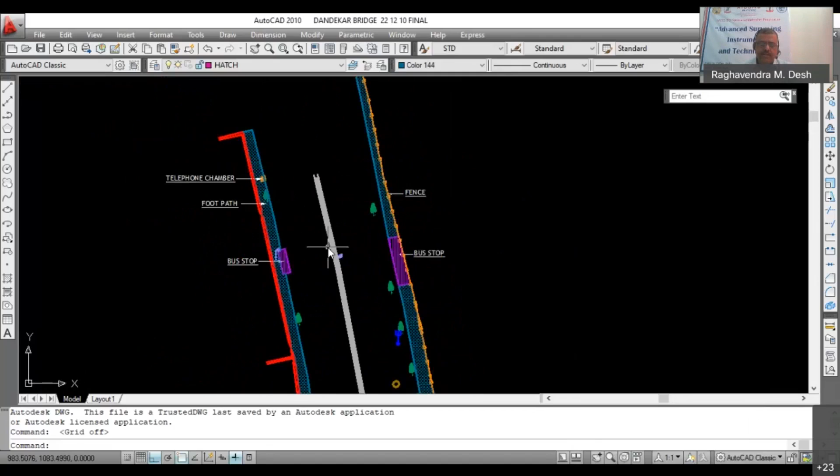If you see these drawings, I will start from the top. What we are collecting is everything between the roads - the plot boundary, the compound wall, on the other side this is fence, then the footpath, the divider in between, the trees if there are any, the chambers. Then we come to this junction, where there is a traffic island with some statue. Then again the same details all around the four lanes, five lanes which are going there.

Now the interesting part is this - you can see the table. We discussed with the traffic department as well as the Pune Municipal Corporation's Pune Police Traffic Department and Pune Municipal Corporation Traffic Department. They wanted data along with the drawing which gives the existing phasing and timing.

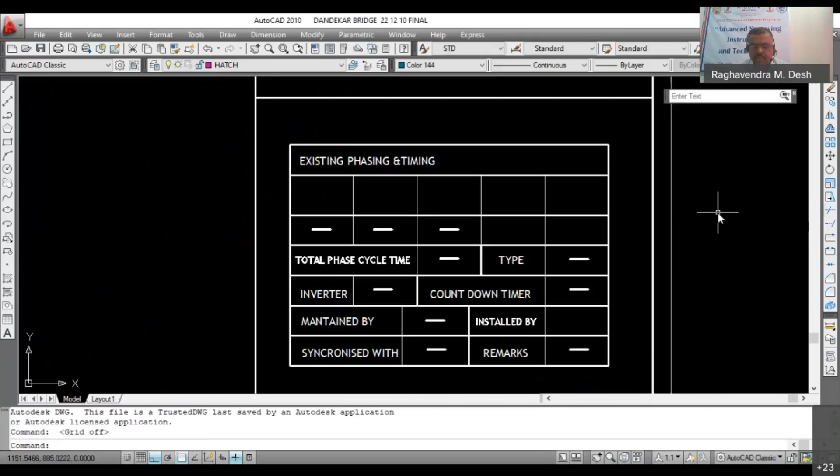Now, what does that mean? Unfortunately, we didn't have any data for this particular thing, but I will share another drawing which gives this data. Just a moment... Sorry, I'm just trying to get the drawing which has this data. We filled up that data actually, it's placed somewhere, but it's not there. I'm sorry, unfortunately I don't have that data.

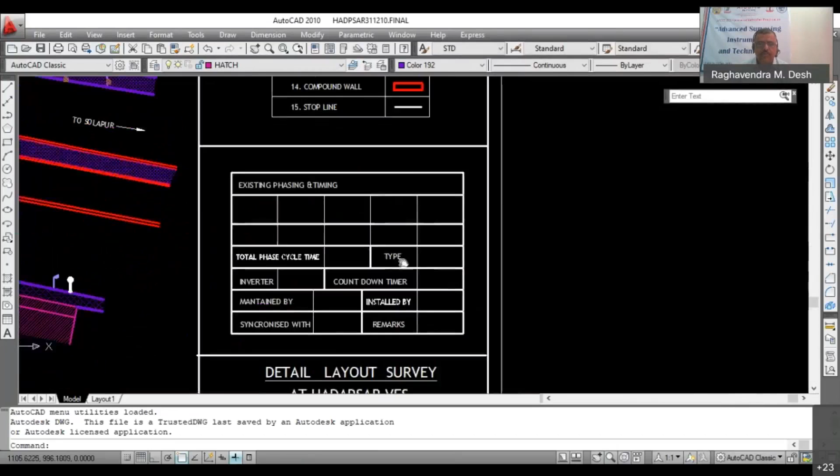But these are the columns which show the direction of the signal, and below that we mention the timing of that signal - how much time is given for that particular signal. For example, suppose you are coming from here and you have to turn right - then the signal in front of you, for how long is it operating, and likewise for all other sides as well.

And then we have to work out the total phase cycle time, how much total signal timing there is, then the type of the signal, whether it is LED or conventional light, and likewise whether it has any inverter facility, so that in the absence of MSEB, if there is MSEB failure, then the inverter can be put to use.

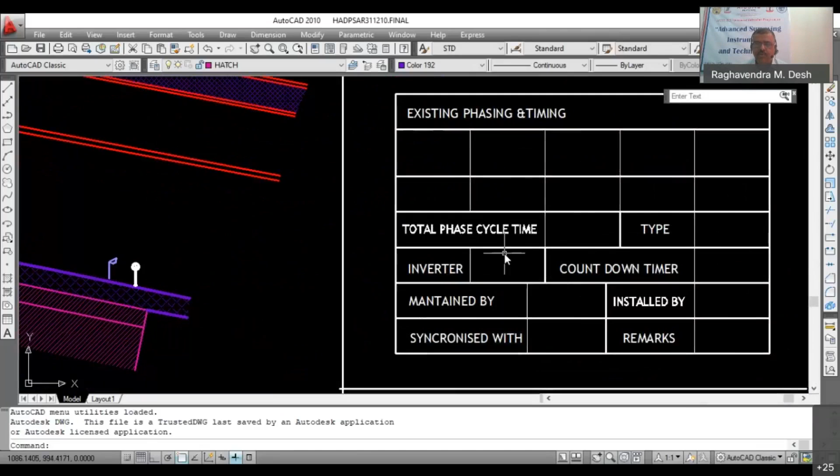And what is the countdown timer? Because now, when the traffic signal is operating for say 30 seconds or 15 seconds or likewise, you also get a countdown timer from the other signals, that this signal is going to be activated in say another 60 seconds or 90 seconds. So that countdown timer, whether that facility is available there.

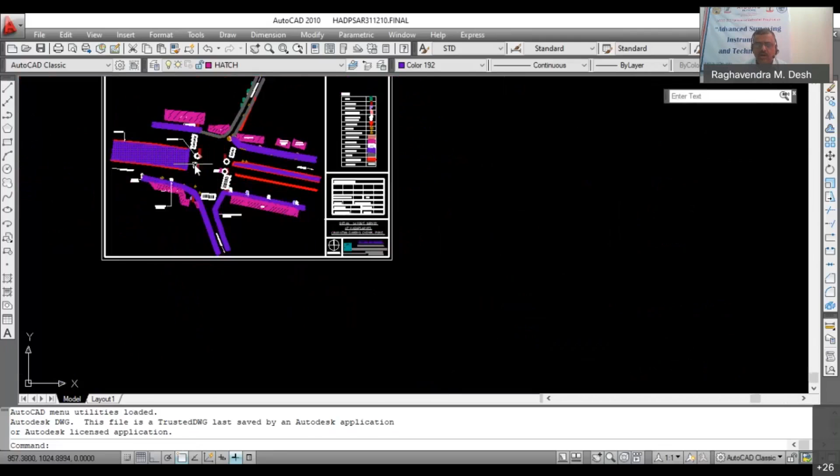Then who is maintaining that particular signal, the entire setup of that signal? So that was one part. Who has installed it? Then also, this is interesting - whether you can see the junction here, but if this signal is synchronized with the earlier signal on all the other sides. So that was one thing which we have taken there.

And then the remark, if there is any specific remark for that particular road junction. Now you see this is a good combination of survey drawing and the data. Now you can see all these things integrated in GIS, the drawing and the data. So likewise, even at a very small level, even if you don't have facilities like DGPS or GIS, you can still maintain these records.

Now we have seen about 500 to 600 road junction booklets with the Pune traffic police people who have all this data at a certain point of time. Now this data was not updated. As we discussed yesterday, this kind of data is useful for budgeting, for planning, for how you can phase out automation of road signals at almost every junction, and whether the position of signals is correct or not.

Because as development takes place in a particular area, the road width increases, traffic density increases, then you may have to change the signal position as well. Even the phase timing and all this data can be changed, modified if required, and then prepare a new drawing which will again form the basis for further record.

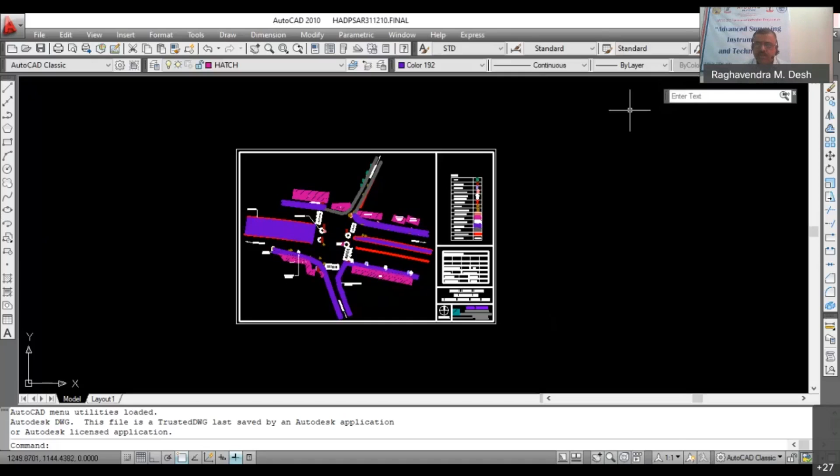So this is an interesting example of what we can call the traffic junction survey. Now these things can continuously go on every year, and there is a lot of opportunity created for jobs for surveyors, because then there is no dearth of survey work. Now you can see this particular drawing again here.

As you may be aware, whenever road development takes place or road widening happens, you tend to change the road levels with a new gradient, or if an asphalt road is to be turned into a concrete road, then you need to have the levels and what would be the final level of that.

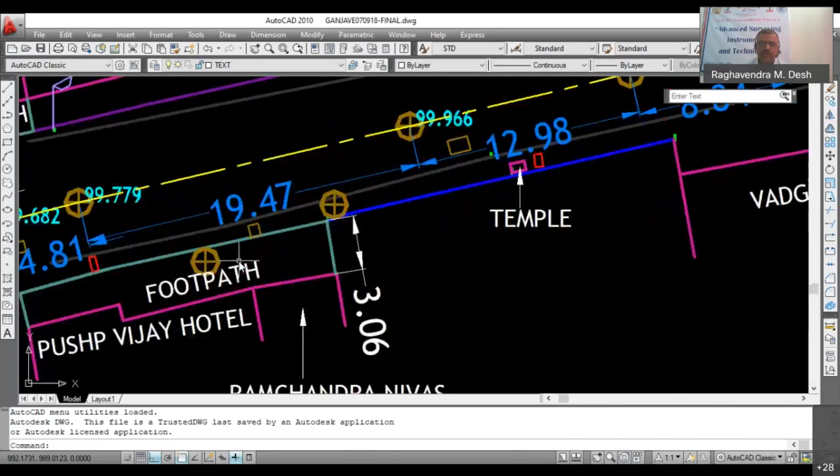So here you can see we have done the survey of a road. As you can see here, these are the road edges, then this is the center line of the road, the tentative center line of course, and the structures which are adjoining the road. Now these structures are important to know.

We know the location of these structures is very important, because when you want to expand the road, how far they are touching that. Now this is a physical record of the structures. When a road, in the DP plan, road widening and all the things are mentioned, most of the times they are not concurrent with the ground reality.

So these locations, if a road has to be developed or a stretch of a road has to be developed, then you need a survey which will give you the readings of that particular existing road level and how up or down you want to raise that level. So these kinds of surveys are also required for road contractors, for municipal corporations.

Because then you have this in AutoCAD drawing, you have the total road length, the BOQ, and everything can be prepared based on this. So how important are these drawings, survey drawings? You will understand when we see this kind of data being put on the drawing.

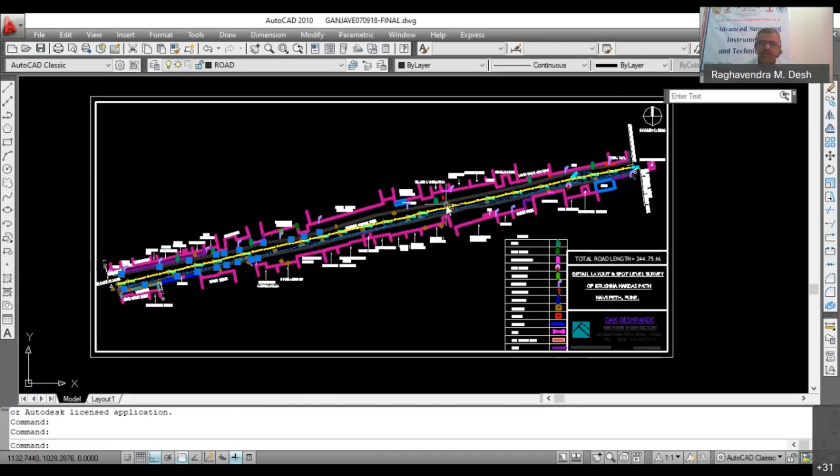So as I mentioned earlier, it is again a technical document basically. I mean, any survey is not just a drawing; it's a technical document. So we'll move on to some other drawings as well.

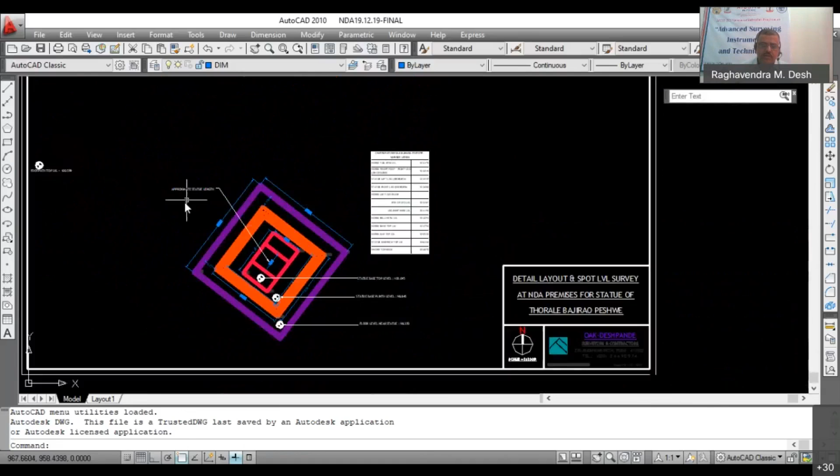So one more interesting survey we have conducted last year. I would have preferred the photograph. This is a survey we have done in NDA, Pune. They want to put up a statue of Thorale Bajirao Peshwe within the premises, and for that there's a reference to the Chhatrapati Shivaji Maharaj statue. This is the position of the Chhatrapati Shivaji Maharaj statue, and this is the proposed location for the Thorale Bajirao Peshwe statue.

Now you can see here, this is the top platform. What are the levels we have shown here? You can see the level at the bottom, a step higher here. Then almost the same level. Then this is the top of the statue here, the base of the statue on the top of that mound.

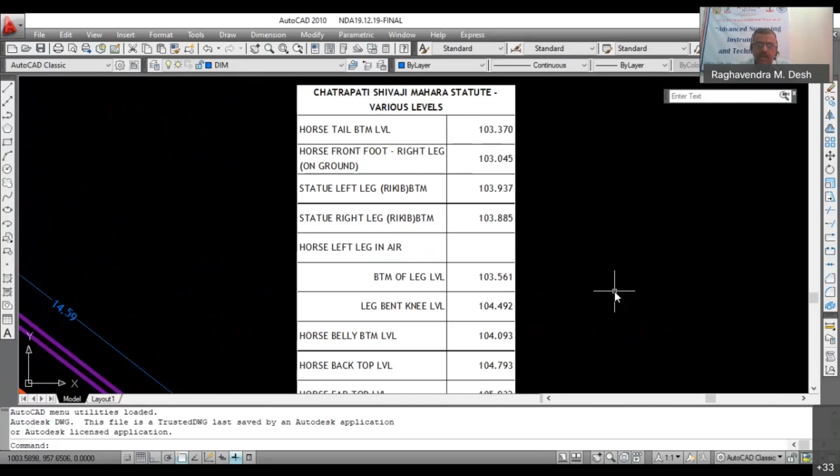Now what levels we have taken, you can see the various levels: the horse tail bottom level, then the horse front foot right leg - the front foot is raised above the ground. Then statue left leg bottom level, statue right leg bottom level, horse left leg in air - the bottom of the leg as well as where the leg is bent at the knee level. That level we have collected.

Then the horse belly bottom level, horse back top level, horse ear top level. The statue's shirpech, or crown of Chhatrapati Shivaji Maharaj, top level of that, and the sword which he's holding in his hand, the top level of that as well, top edge. So you can see all these levels we have collected.

Now again, these things can be possible with measurement as well, but when you want to relate that in the drawing with the position, then you have to have such kind of survey done, and this gives a fair idea for people who cannot really imagine or visualize how things are there. So a photograph attached here of that Chhatrapati Shivaji Maharaj statue would explain everything we have collected here, and the position, how they are placed, and when the other statue is to be erected, what should be the levels for that.

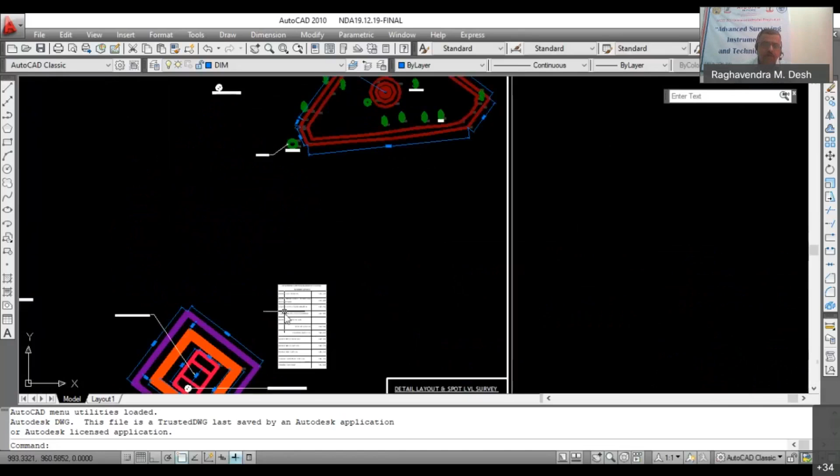Base and everything can be determined from this statue as well, because they don't want the Thorale Bajirao Peshwe statue to be bigger than the Chhatrapati Shivaji Maharaj statue. So that was a statutory requirement for this particular statue erection. So here you can get this thing - why we have taken this list, for the same reason.

Even now you can see here, this is the length of that top bottom surface on which the statue is erected. So this is again an example of how survey can be utilized, how total station can be utilized for this type of data collection. We would call it a data collection rather than a survey - data collected and represented on the drawing. That is how we look at it.

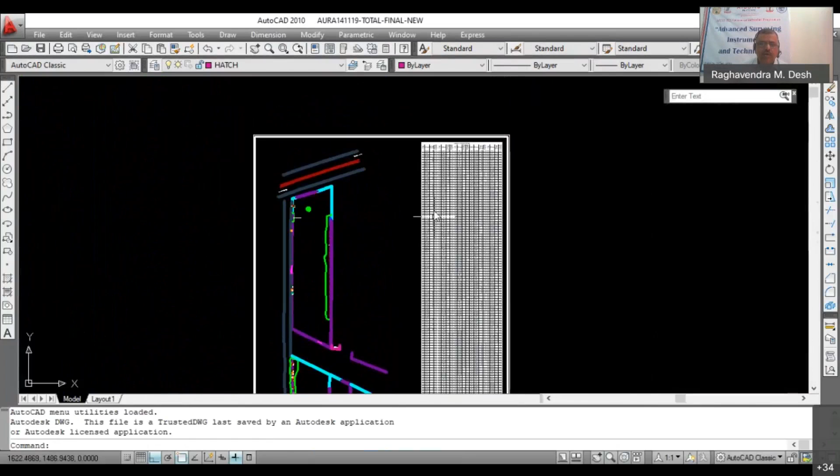Now, again, as we have seen yesterday about the drawing of a tree survey, here also we have done this tree survey and a table. As I told you yesterday, these things are required for auditing purposes. You can see the table here, the tree number which has been put on the tree and put on the drawing as well. Then this is the approximate bole diameter. At times we have given it in meters, so it has to be in either centimeters or inches to understand it properly, because everybody doesn't understand these decimal things in meters.

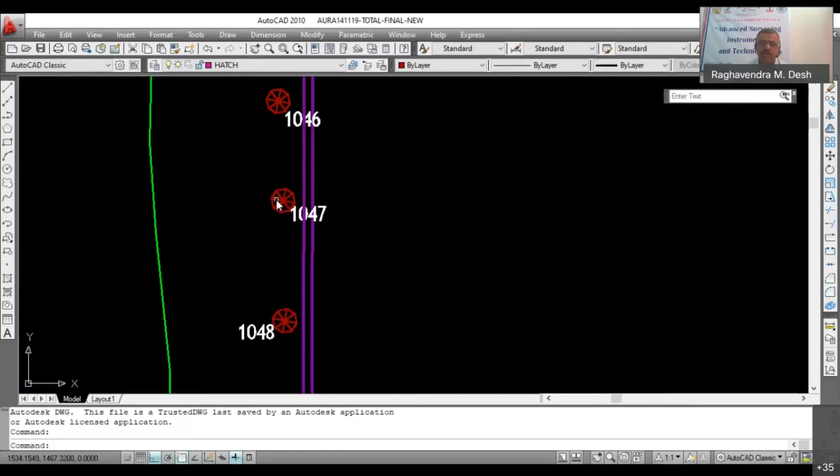And the approximate height - though now where this is, we have said 'P', that is the newly planted trees, very new trees which are hardly a meter or so, and they have grown up a little bit - this 2 meter, 3 meter, or 6 meter tree. Now you can see here, these things when they go to the environmental department for their audit, these kind of numbers are put up. Then we have mentioned this prepared block and nomenclature it as tree coconut - so it's a coconut tree. This is again shown in this legend as well. Now tree coconut, you can see it here.

One more aspect of doing the drawings from the survey we have done is the use of layers. I will just show you how many layers we have used here.

Now you can see these are the layers. These are the mandatory layers from AutoCAD: compound wall, dimension, divider, GI sheet. The GI sheet we have taken the other time. This survey we have done twice, so this is the original and this is a new GI sheet. Then gate, structure, thick edges, and every tree that has been surveyed is put into the layer. Now, why is this layer business required?

Because then the drawing can be very well distinguished. If you want to measure the number of trees for a particular type, say you want to see the Christmas tree or coconut tree, you can just switch off all other layers, open that layer, and count them. So you get a count of each type of tree in that drawing. You can also get the total number of trees by numbers, but the category-wise or name-wise differentiation of trees can be obtained from these layers. So this is how the layer business is actually used, and very effectively used.

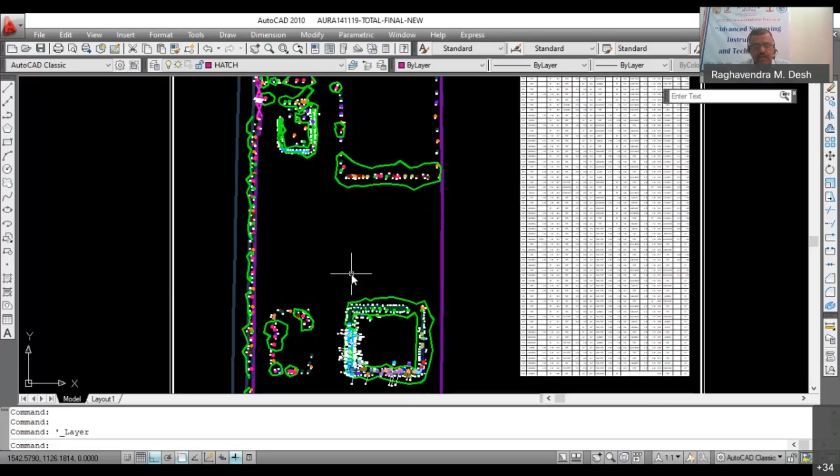So this is one of the surveys we conducted for the tree survey. The frequency of these surveys has increased over the last year or so, because the environmental requirements are all there. So these kinds of surveys have increased.

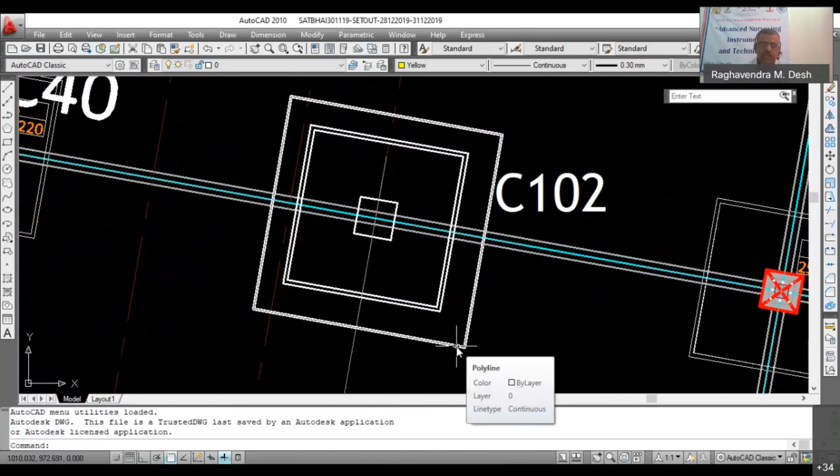Now you can see here, this is the footing. Then we have given these points at a different location, even outside the footing, so that the excavation margin and everything is taken care of. Then, as we told yesterday, here we have not marked those circles and points, because now these are represented by the column number. Here what we have to do is give the setting out first for the footing.

For the PCC, then footing, then in industrial cases it is the pedestal which is then cast. If the pedestal is cast, we treat it as a column only. We even call it an RCC pedestal on which the base plate and the foundation bolts, or column bolts, would be mounted. Now those starter points are marked again.

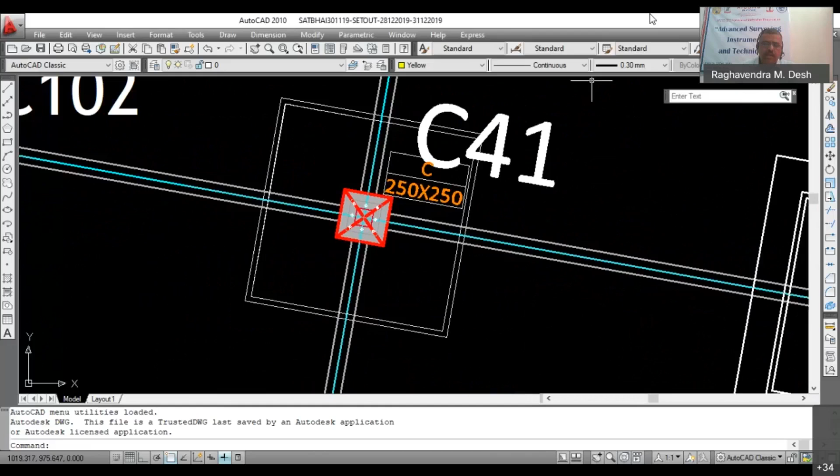And then when you want to fix the base plate, this base plate position also can be marked along with the bolt. Now, as you are aware, whenever this base plate is to be put on top of the pedestal, first we have to mark the bolts. Once the bolts are concreted, then only the base plate will be fixed on that, and then the nut would be fixed likewise.

So here, these are the points which are marked. You have to take the base plate and the bolts, and then the position of the base plate and bolts is fixed on top of the pedestals. It is tied or welded properly, and then the casting is done. So for industrial purposes, up to these points, the survey setting out work can go on.

Then they don't have multiple floors, so for all these columns, these things happen and these setting outs can be done. Once these bolts are in position, we don't need further assistance from survey. Then the structures can come up, because nowadays they are all precast structures, so the structure can come up.

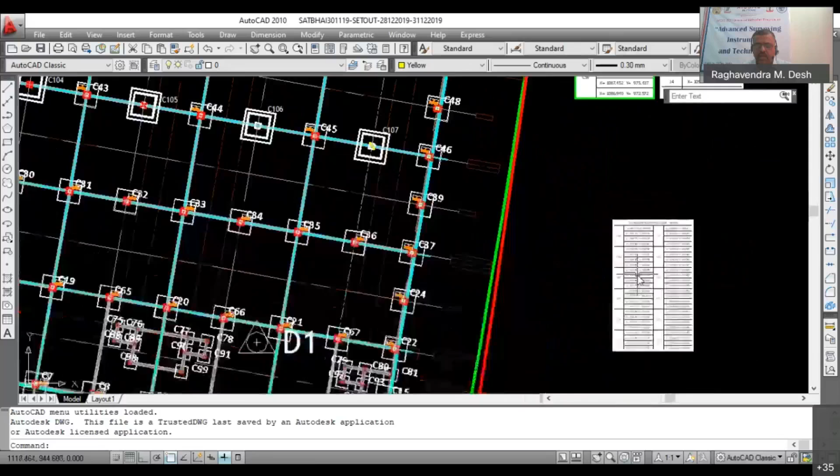Now we can give the coordinates like this: 1, 2, 3, 4. These coordinates represent the column corners, or rather the footing corners for that column. So we have to mention the coordinates for the footing corners, so that they represent that column footing.

So they are placed accordingly. Now, as we discussed yesterday, normally for a footing we take a marking of plus, on the edges of the PCC. At times, people also want these coordinates - the corner of the footing block - marked on the PCC, so that they can fix up the footing box accordingly.

One thing you must understand here is that whenever a surveyor goes to any construction site, he has to work in close coordination with the site engineer and contractor. Whatever services we are offering to these people, they should be put to maximum use. So you always need to discuss with them how they want these points. It's not a standard thing that wherever you go to site, you only work out certain points and do the setting out - you have to discuss and have close coordination with the site engineer and contractor as well.

Why the contractor? Because his people - his team of carpenters and fitters - would be working on these markings. So how comfortable are they with these markings? That is something you need to discuss with them. That is one aspect of interaction with the contractor.

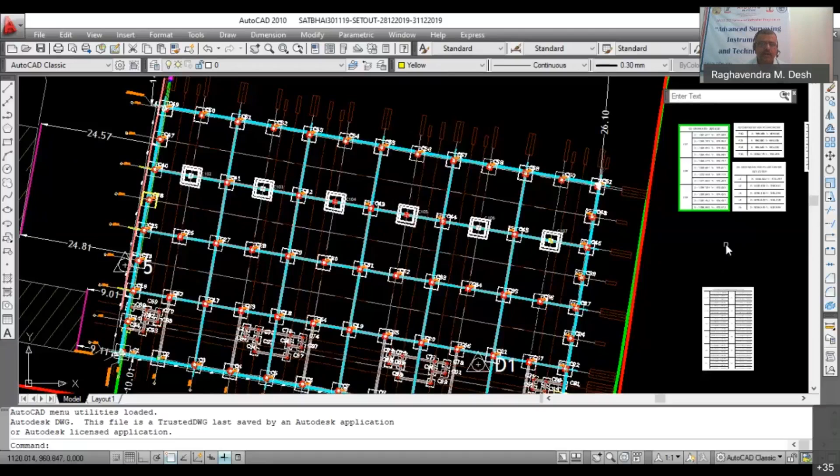Once they give their inputs, then accordingly you can work out the coordinates and do the setting out. Just because you have the machine and the facility to do that job doesn't mean you have to do it on your own - you have to have very close coordination with these people. Then only it will help them, then only it will boost their confidence that these things are really useful and accurate. They are definitely accurate, but when they see it on the ground, only then will they realize it, visualize it, and feel comfortable.

For these kinds of setting out, especially columns and footings, one more thing that comes along with setting out is that whenever these settings out are happening on site, the checking of these points should happen on a daily basis. So if my survey team goes on site and marks all the column centers, and just leaves without checking...

If there is something wrong - if that coordinate is not properly fed, or the machine has been slightly disturbed and the coordinates on ground are not correct - then if the contractors or engineer complain to you after a day or two that the points you set out are not correct, then everybody is at a loss: loss of time, loss of confidence, loss of interaction between the two.

So to avoid that, if checking is done on the same day, then you are sure that whatever points have been marked are correct. If not, they are corrected right there and then. So whatever work has been conducted on a particular day is not wasted. This is something we must understand - whenever we do these kinds of jobs, we have to ensure checking happens on a daily basis on site.

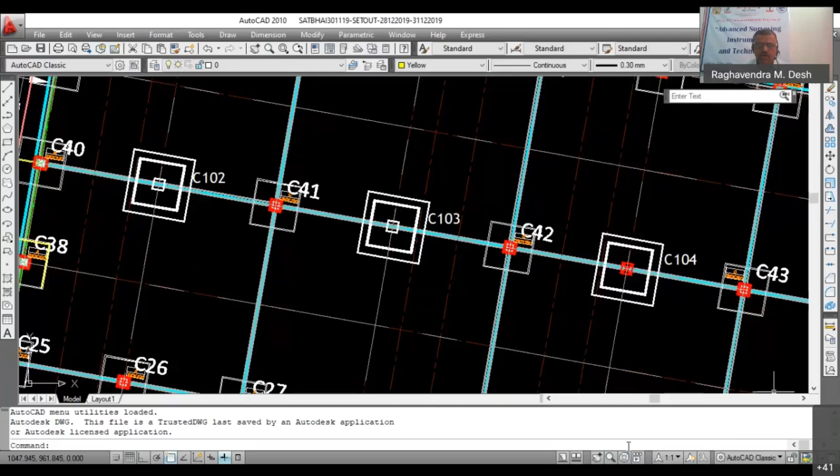At many sites, the total station is in use every day for continuous development - used every day to maintain the record and take the work forward. If this checking is not done and you just keep marking points going forward, you're not in a position to understand whether the previous day's work is correct or not. Engineers and contractors tend to believe that since you are using a total station, everything would be accurate. But you must remember the total station operator is also a human being, and is also subject to some kind of error.

He is also subject to making some kind of mistake. The only thing is that without blaming anybody, we have to correct that mistake on time and there itself, so that the work is smoothly continuing. So these are the few things.

Now, as you know, these things are not part of the academics. But whenever we are discussing or teaching total station and its utilities to the students, for every type of work they are doing, you have to take care of a few things. And those things, when people go out, even the engineer or diploma student who would not be working as a surveyor in future, he should understand these things.

He should be aware of these things, so that whenever a surveying agency is appointed or is there on site, he must understand what kind of work he has to get done from these people, and what kind of checks he has to make from the survey data that has been generated. Just because the total station is there, you cannot take things for granted that everything would be accurate and there would be no need to check.

Whatever is given by the surveyor is good enough and we can just go ahead with that - it's not like that always, though it is the case many times. But it depends on the quality of the surveyor and his experience, and the emphasis he is putting during the survey is equally important.

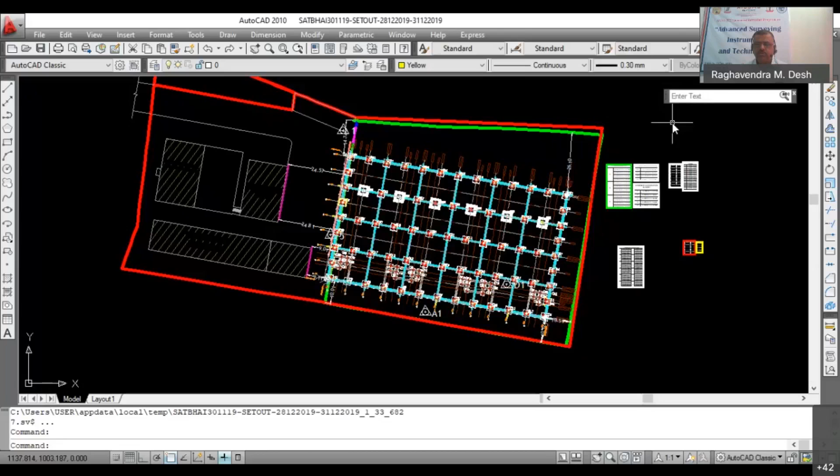We have seen - and I am also not an exception for that - even though we have been taught total station, when you go on site, you are fumbling there. You don't know how to conduct a survey on site. So the assignments or projects for survey, if conducted under the guidance of some professional agency, these people will understand it better. Even if they just observe and operate it in between, it would be helpful for them. So there are a few things attached with the survey.

We'll just move on to some other drawing now.

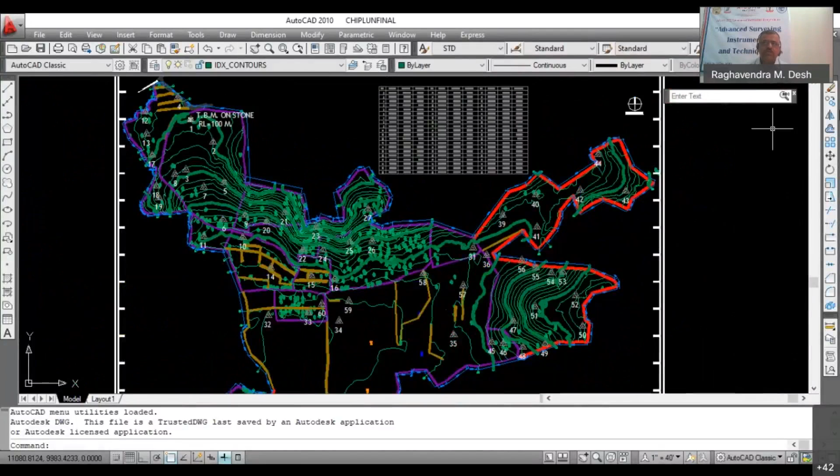Again, this is a survey plan for a chemical company, Gharda Chemicals. These are the details we normally collect, and you can see these details are consistently present in every drawing. Whenever a survey is conducted, there has to be consistency in collecting the data, processing that data, and putting it on the drawing.

We must always understand that when an assignment or job is completed and the drawings and deliverables are submitted to the client, they should be able to understand the drawing easily. A repetitive client may understand the drawing if the layers are constant - the type of layer, the name of the layers, the color combination of the schemes. These are not just cosmetic things which beautify the drawing; they are things which make the drawing easier to read. We should always have this approach when we prepare a drawing.

So even when the survey drawing is prepared in college, everybody can operate AutoCAD now - you don't do the drawings manually. If they want to do the drawing on AutoCAD, they should also make use of these things. In the civil engineering department, if a survey is conducted, we can also take help of AutoCAD, with someone teaching it to understand how the drawing is to be prepared.

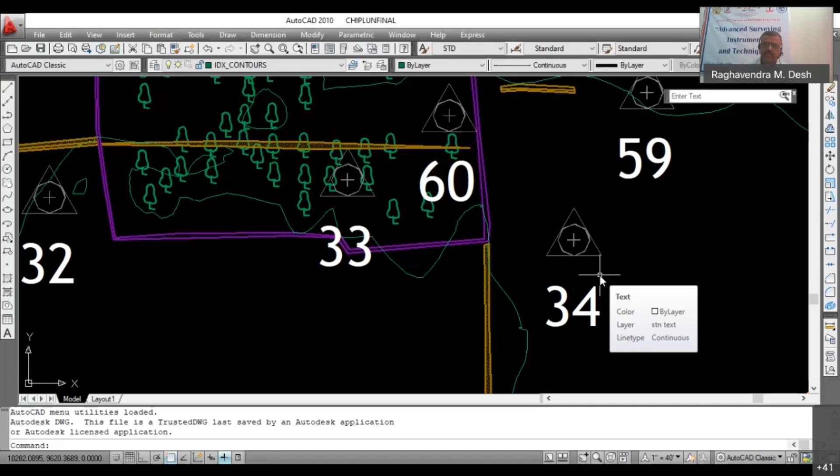Once you check that and get those things proper, then your survey is correct. So when the data comes, you have to understand whether the sanctity of the data is there or not. These are all subsequent things when you start using total station - collecting the data, checking the accuracy of the data, downloading the data, processing the data, and preparing a drawing finalized based on that data. This is how a total station survey proceeds.

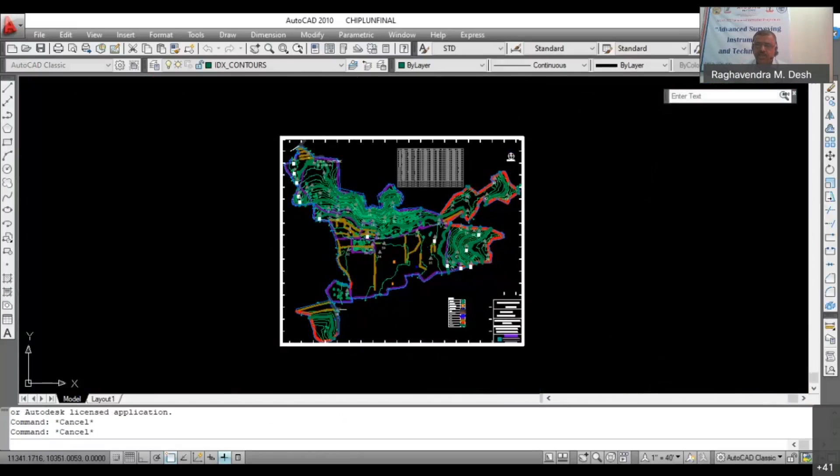Now, the survey has become easier comparatively as compared to earlier days - it has become very fast, very accurate, and more approachable to a number of people. Now you don't have to be an engineer to do a survey with total station.

As you are aware, the ITI also holds a course for a surveyor, which is about a 2 year old course, and maybe some lesser aspects of survey and working have been taught in that ITI 2 year course. The emphasis in ITI is more on the use of the total station. So they are less equipped with the technical knowledge of survey compared to diploma or degree students, but they know how to operate. So there is a basic difference - they are basically not surveyors, but mostly machine operators.

Now, looking at the increasing requirement of machine operators, many institutes have started short term courses. These short term courses can last from a week to about 6 months, or maximum a year, for total station operators.

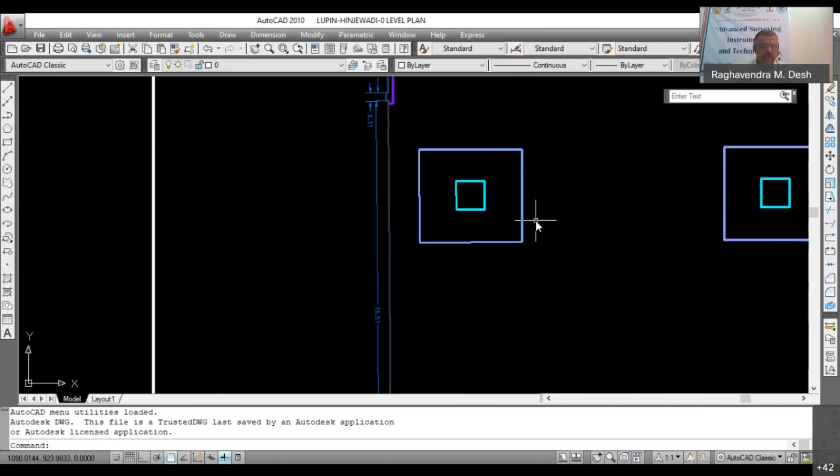Nowadays, on many sites they use the flat slab, so there are no beams, but there is a column head, or whatever different name they call it, but I call it as a column head. So this is the column and this is the column head.

Now to understand the purpose of this particular survey: this building was supposed to be hired from a particular company, from the building owner. Now when they want to hire this building, about 8 to 10 floors are there.

They want to understand the feasibility of the floor plans. Feasibility of the floor plan is how best they can put this floor plan to their requirement. So that was something they wanted to know, and they didn't want to rely on the old drawings. So they wanted to make these drawings, or I think those drawings were not available or made available to them. So they had to do this exercise to prepare the floor plans on each and every floor.

Now why these ceilings? I will tell you the requirement of this ceiling plan for the rest of the floors. Here, there are no tendons, so this is just the floor, and this is the column. These are the columns, then these are the same columns, but with the column head. So those two plans are the same plans at different levels for a particular floor.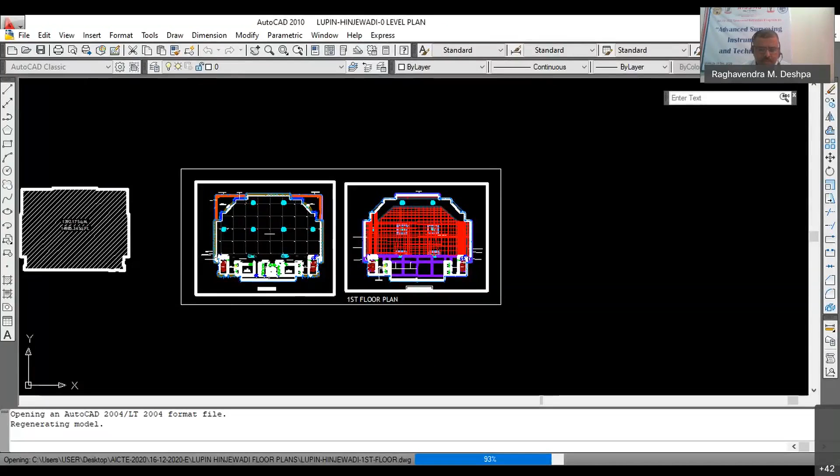Then when you go for a first floor, now you can see here. So whenever the drawing is opening, you can see these columns. Also they wanted to know the levels of the floor, whether the floor tiles and all the flooring has been removed properly or not, how much work, how much money they want to spend on cleaning or leveling the floor to a certain extent. So again, this is the data what they wanted.

Now you can see here, these red strips. You can see on every ceiling nowadays where the flat slab is there, they have to mark. You can say red paint marking, a paint strip is there. Now these are supposed to be tendons, I think, which are used in pre-stressed concrete, and you really cannot drill into these areas. So why they are shown here is to understand that you cannot drill along these red lines. You need to drill if you want to put up something, then it has to be between these lines.

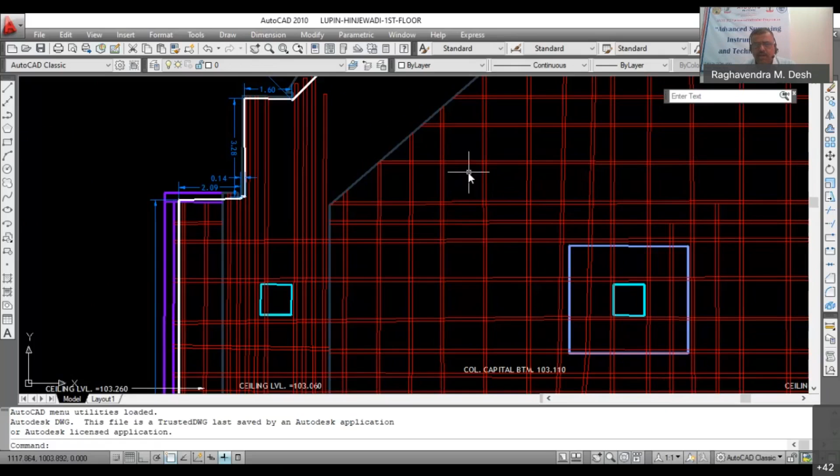Now why it is required? Whenever you are having a false ceiling or services going at ceiling level, then you should know where you can take them. You should also know that whatever the floor arrangement is going to be of the entire office setup at that particular floor and ceiling, they are not conflicting with each other. I mean, it should not so happen that an AC pipe or some AC ducting is going right above the top of a person sitting below that area, and you cannot really do the false ceiling there, something like that.

So they want to understand whether these things are possible there or not. This is a good example of whatever data we are collecting and how the data is put to use. Now, likewise, you can see these are the plans for each and every floor.

Now, the lift position and these toilets and the other ancillary rooms, they can be put to different use. It's not very difficult to put them to use. But this is the main floor plate.

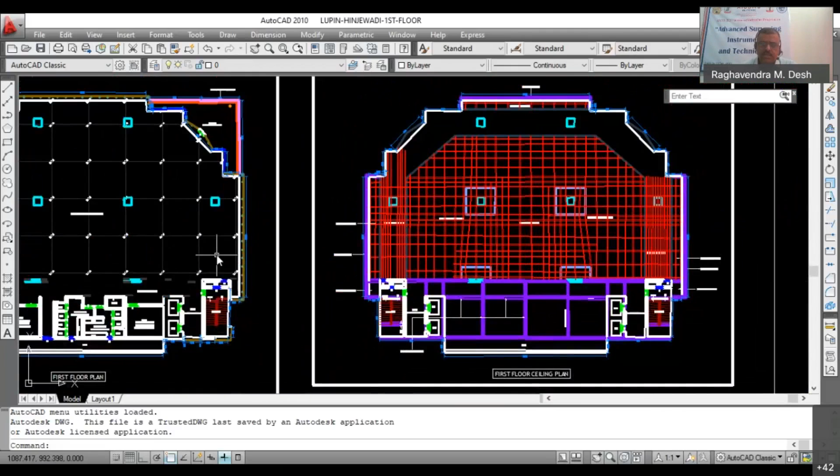Again, the floor plate area, what has been told and what is physically available, whether it is matching or not, as we discussed yesterday, that is something you need to know, because the rates are on the basis of per square foot, and even for 10 floors, if you save some 100 or 50 square feet, that amount can be huge per month.

So this is how these plans are prepared. I'll show you one or two more plans like that. Now you can see the plans are almost same, but you cannot really say that unless you collect the data and prepare the drawings. So even if you want to confirm that all the plans are same with little variation...

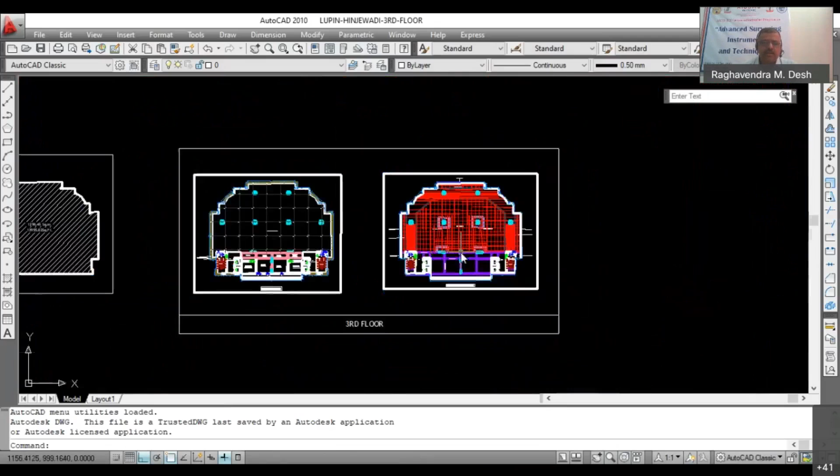Now you can see we have not just copied these red lines from the earlier floor plan, we have taken it everywhere, and that is the credibility of you as a surveyor, which can be established with these kind of accurate and proper data represented on drawing, data collected as well as represented on drawing. So this is a very essential part.

Even the terrace plan, they want the terrace plan as well, because they want to mount the centralized air conditioning system, the pipelines and everything, even the solar panels. So they also need to know how the terrace is placed, what things are put on the terrace. Sometimes the canteen or cafeteria sort of things are there on the terrace, so whether these kind of areas are available or not, this is something we need to understand.

Then again, we have to give this. Now this is essentially a carpet area, what you are giving here. But again, if you want to see a real carpet area, you have to deduct the portion of columns which we have not deducted. We have done this for the sake of our purpose, that we have measured this area.

So we don't want to go by the carpet area or built up area concept, because everybody tries to interpret it in a different way which is suitable for them. So we say it is a measured area, applicable for my billing. That's it, it ends here only. So these are the sort of requirements and the data that we collect from survey.

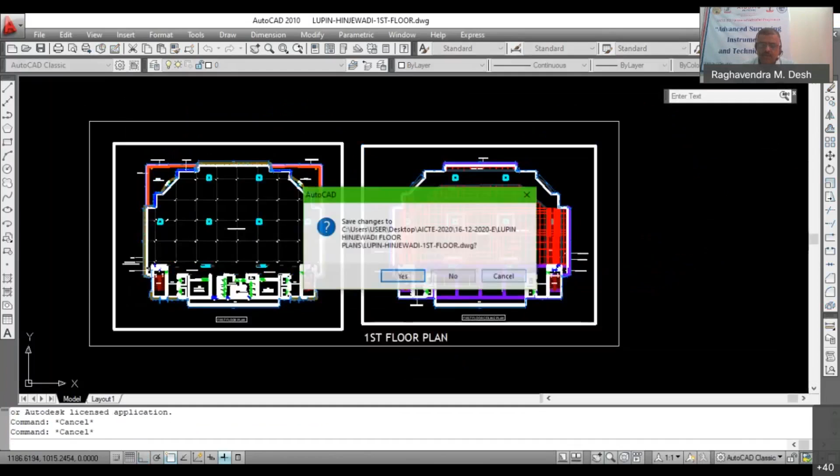So as you can see, when we are explaining to students about the total station, these are the things we should be telling them - the possibilities, the enormous possibilities, the utility of the total station, how best it can be put to use.

Now you see this is an extensive marking for plots. See how many points are there. This is again a plot layout, and it starts again with the road.

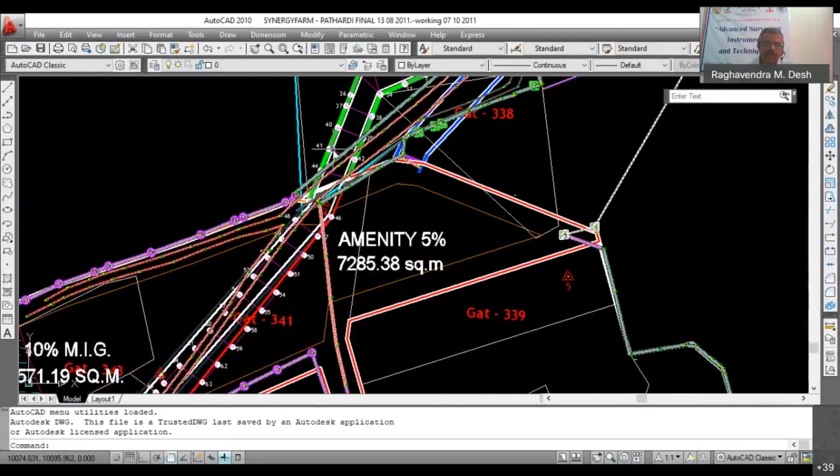So when you enter into the plot, the approach has been defined. So from here the point starts right from here. This is the main road and this is the approach. So these are the road points which are marked at a particular distance, say 10 meter, 15 meter or 20 meter, depending on the terrain.

So that the adjacent points, the point ahead of you and behind you, are visible, so that if you want to do any kind of ranging in between for excavation and all, you can still do that. So this is how the requirement is, and then these points are marked here.

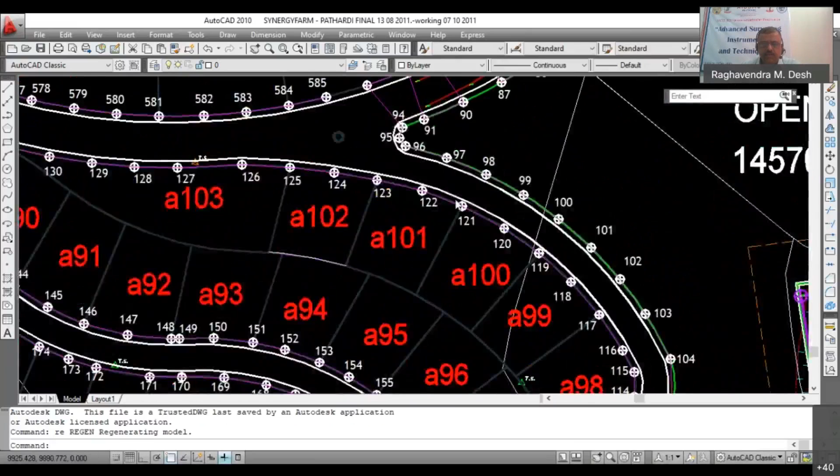Now again, as we spoke yesterday, once you mark the plot points, the road gets automatically demarcated. Now this is a very curvilinear frontage. So you just cannot restrict yourself to marking only these 2 points. Otherwise, if you join these 2 points by a straight line, you will lose some area here.

So you have to have the point in between as well, as you can see here. Now this is again as per the requirement of the site, what I am telling you.

Now this is a single plot. You can say I am marking only 4 corners of the plot, but it cannot happen like that. So depending upon the nature of the plot, size, plot shape, you have to determine how many points you have to demarcate on the ground to determine the position of the plot. The inside plots we have not marked because the first task was to mark the roads, and then these points automatically get marked because they are the plot points as well.

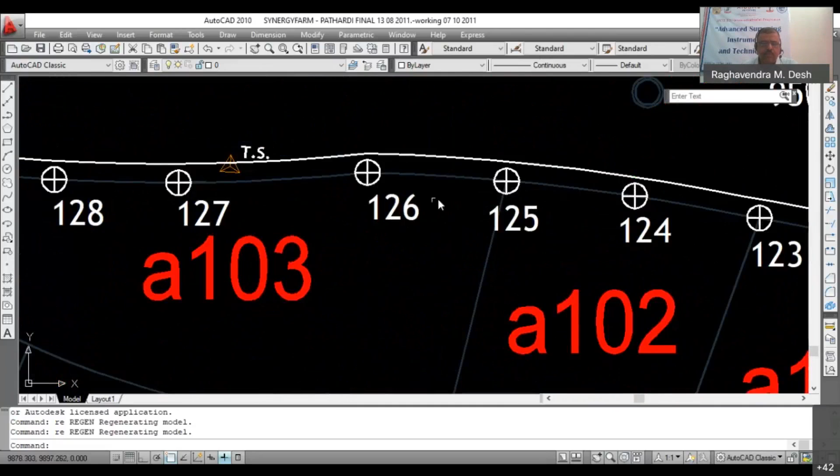Now, why are these points picked up and not some random points? Because then you can identify the plot corners from those points as well. So the double purpose is served. Here you are saving something for the client - some money, some time - and you don't need to mark these points separately.

This is being done at this very initial stage. You can see these points at a longer distance. When you're actually doing the concreting or asphalting of this road, then at that time you need to have three or four more points in between these points, at such locations.

So you understand that the requirement changes constantly. I'm mentioning this point repeatedly - there are no standard things, you can say there are some basic standard things, but beyond that you have to improvise. You have to see what the site is, what the requirement of the site is, how the site is placed, how the points are to be given, and how it will be convenient for the person who will be working with these points.

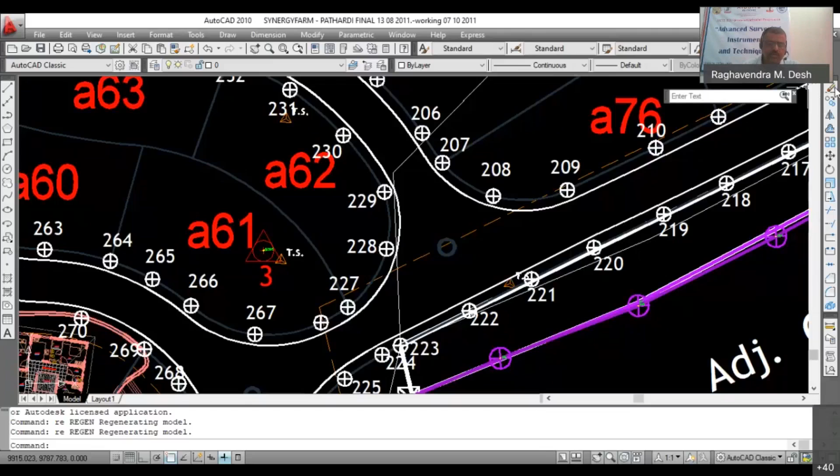So always think of the people who are going to work on your points whenever you do any kind of survey. This is very essential. You cannot really ignore that and go ahead with the survey without consulting with them. Now this is a bit different use of these contours we have drawn from Google.

At some point of time there was a facility in AutoCAD Civil 3D - in one of the versions, you were able to draw contours from the Google image. So in this particular case, they had not taken the plot, they had not finalized the transaction for the plot, but they wanted to understand the topography of the plot, and it was not all visible as you can see from the image.

This is all vegetation cover here. So it was not possible to go there and do the survey. So we have done it from Google instead.

Now if you see this, this is a sort of stream - you can see this line here. You can see that blackish thing, which represents the water here. Again, it is turning in this direction. Now the contours also - you can see the line is exactly following that path. This line is following the same, not exactly the same profile, but close to that profile.

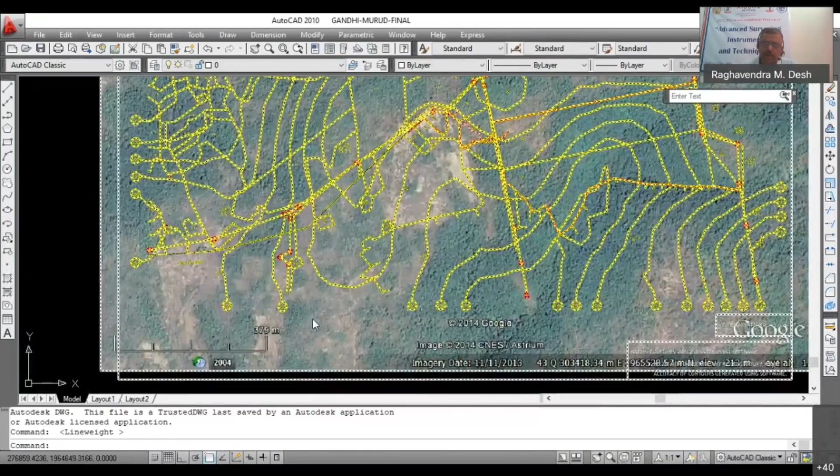So this is how you need to check whether the survey you have done is correct or not. As you can see here, this area is a plateau on top, and then the slope starts further. So this is a fairly flat area or a gradual slope area as compared to the rest of the plot. And this is how the contours were drawn.

And then there's a facility to draw the contours to the scale of 1 to 1000 - scale contour of 1 meter and 5 meter interval in that multiple. Now it is not available as a feature because they have removed it in the next version, something like that. So this is again the type of survey we are doing without going to the site.

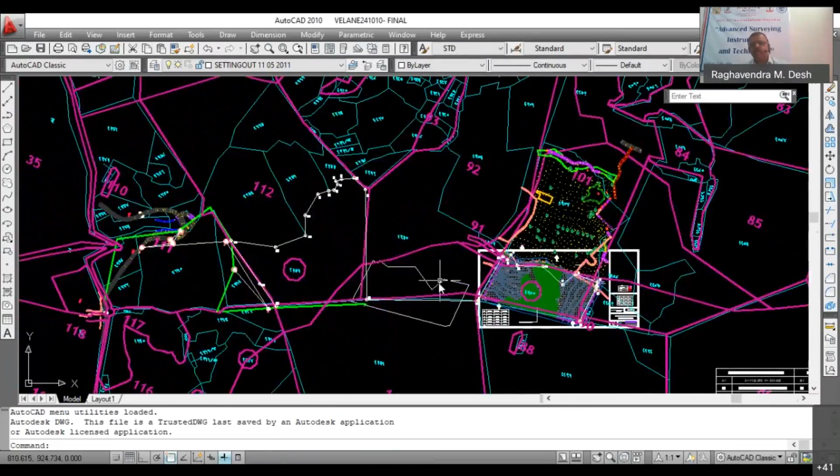Here again, here again you can see - now this is something which I will be discussing as a case study on Saturday the 19th, in the 19th practical. So this is particularly a village map.

Now one thing which we also need to cover - when you are explaining to the students about the survey work, you also need to tell them about the documents. What are the documents required for a piece of land? As we know, there is a 7 by 12 extract, then there is a government demarcation, then there are other documents as well, and then the 8A form.

In Maharashtra, in Pune, we are telling you this; in your place it may be a little different, but it should be on the same lines. There are many forms and documents available with the government, and the government keeps these records. So to keep all these records, whenever a student goes out, he doesn't understand all this. He just goes by the site as shown to him, and whenever the site is shown, he has to do the survey, come back, do the drawing, and deliver it. That's it. So that is one aspect of it, the technical aspect. There is another aspect which is legal, related to any land - legal and technical.

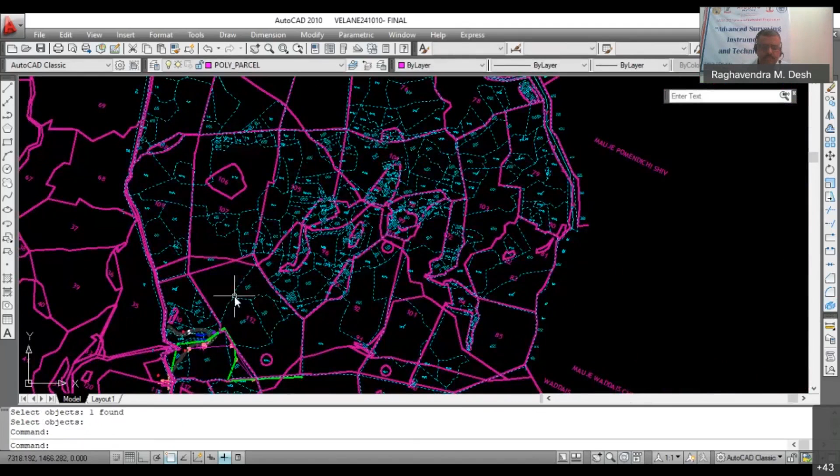Now you can see there are village maps everywhere, and these village maps are numbered like this - they are either survey numbers or gut numbers. So if I want to purchase land, say survey number or gut number 1016, this is how the land is shaped as per the record, and this is what the area of the land should be as per the record.

And then I go on site as a surveyor with a total station. I will be shown some points along the boundary. I will prepare the drawing, then come back and see whether the survey drawing I have prepared has the same shape and size. Now, for every plot, the shape, size, and area - all three things should match. Then only is the drawing complete.

Even if the shape is there but the size doesn't match, it's of no use. If the shape and size are there but the location is different, it's still of no use. So if somebody shows this land as being somewhere here, you are not aware whether the land being shown to you is exactly in the same position or not. This is one aspect of survey. When you go out in the field, you have to know - even if not at first instant, but during the process of survey and preparing the drawing - whether you have been shown the correct piece of land, whether what has been shown is the same piece of land or not.

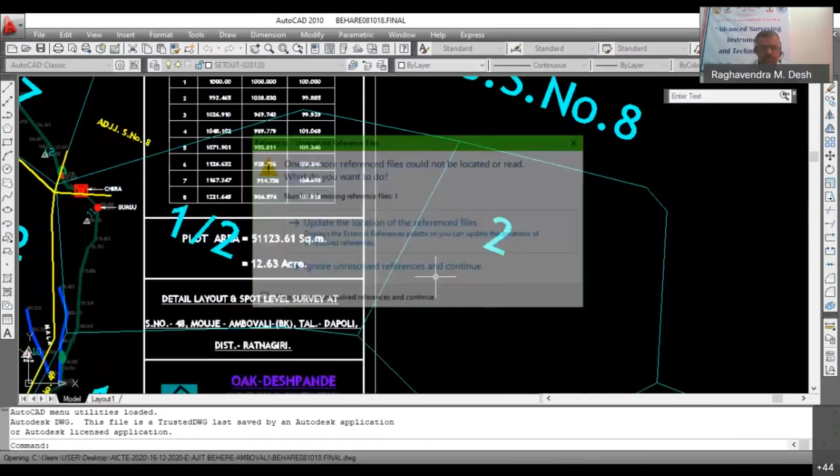Now you can see here, this is a survey we have conducted, and now I want to ensure that this is the same land that we have been shown - I mean, the same land in terms of government records, the survey number or gut numbers. So how do we determine whether this shape exactly matches that or not?

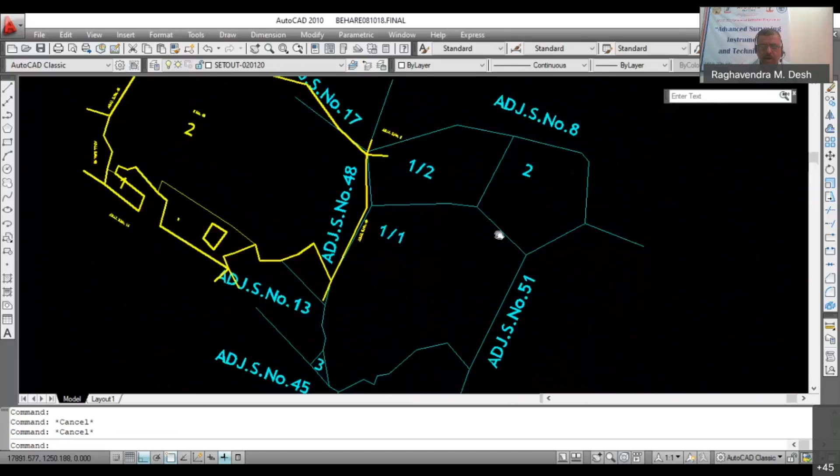I'm not sure what this number is, maybe wrongly placed. This is survey number 48. And there are adjoining survey numbers likewise also. Adjoining to that, survey number 48, these are the two parts of that survey number. Just here. Sorry, here it is.

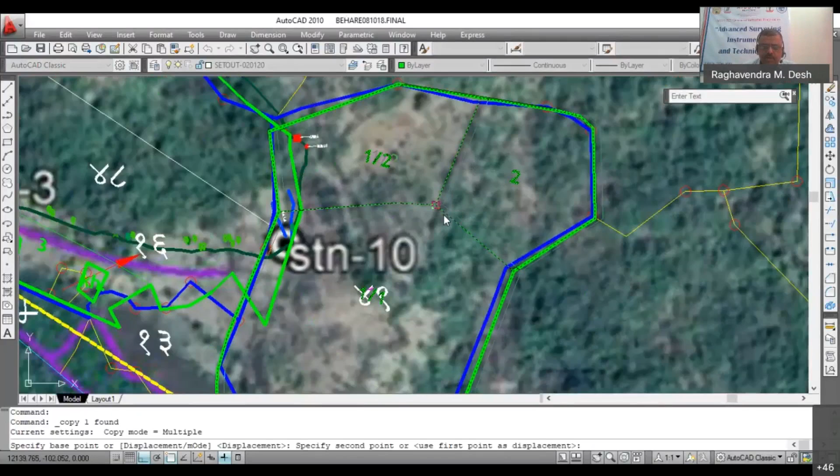This is survey number 49. I have to purchase land in survey number 48 and 49. So here, these survey numbers have three hissa. This is a drawing which shows how many subdivisions are there for that particular survey number. So for survey number 49, there are three subdivisions. There are two subdivisions, and out of that two, one has again two subdivisions. So in all, there are four subdivisions.

Here also number three. So how do you interpret this? This is survey number 49. So this is 49 oblique 1 oblique 1. This is 49 oblique 1 oblique 2. This is 49 oblique 2, and this is 49 oblique 3. Likewise, these are identified, and then we have to put it on Google to understand the exact position of it.

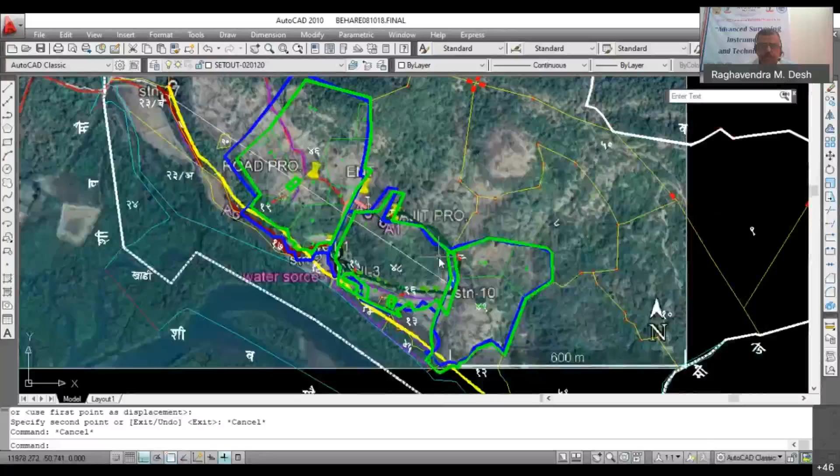As you can see here, these are getting overlapped. So this area is getting lost because it should have matched properly along this line, but it is not matching. So that area is lost probably, and then here there is a gap in between. So whatever area is lost here may have gained here as well. These things happen when you check two different government documents and try to overlap each other. They never, or seldom, exactly lapse.

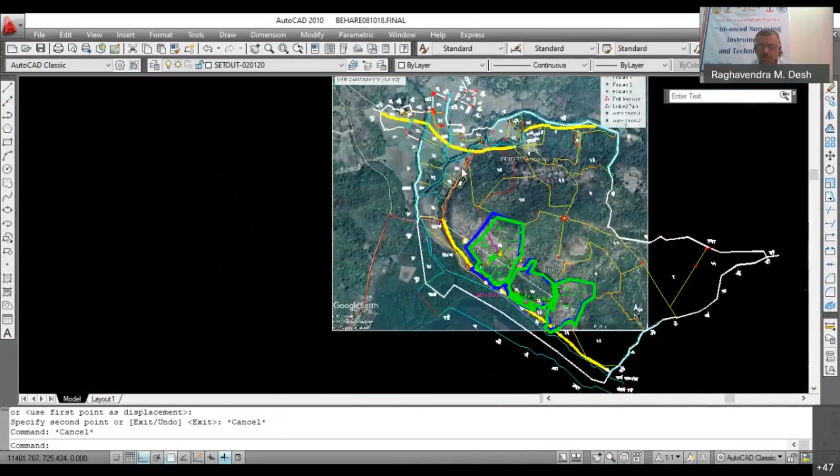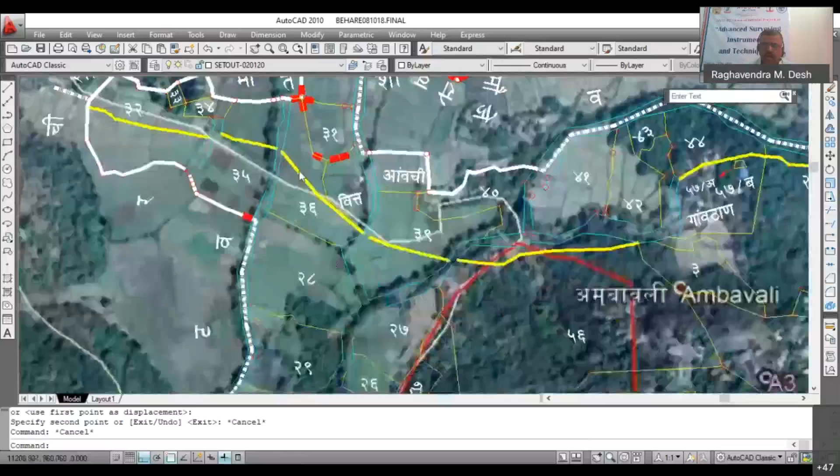So this is how we want to get the location of that land from Google. Now, how this lapping is done: you can see here, this is the stream or a small river in the area. I have to match this because these lines, or their alignment, hardly change. The meandering and all those things happen very rarely, not always. Again, this stream is going here but not matching with this. But these are the defined lines of that field there.

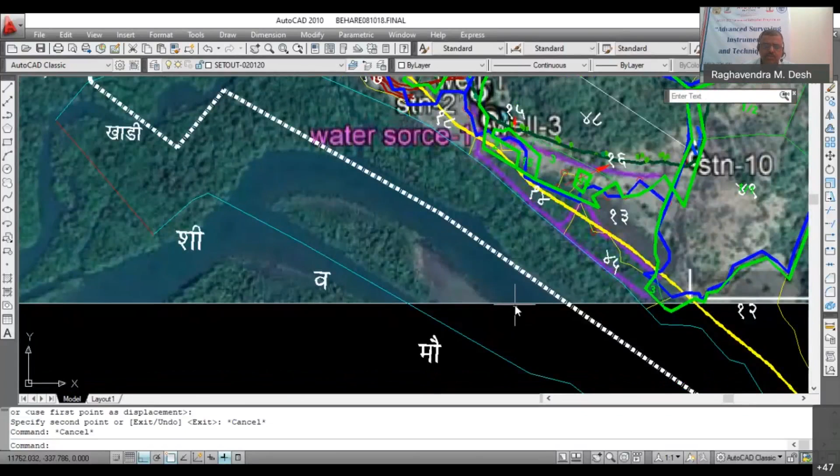So this is an indicator of whether our lapping is correct or not. Again, this line, you can see the shape here. It is just going in between somewhere from here. But this shape is matching, this profile is matching, and accordingly you are putting it on a Google image. Again, here there is a water source, so this is leading to the creek. It's just adjoining the seashore. So this is how you arrive at this particular location of the plot.

So a surveyor essentially, what we tell people is, you give us a 7 by 12 extract and we will show where your land is. How we do it: we get a village map for that particular piece of land. We superimpose that village map on a Google image, open source of course, and then we try to locate his land. Then we give him the coordinates for that particular land parcel corners, and once these corners are given, he can go to the site, do the stakeout, and find out whether the land is still available there or not, whether somebody has encroached it or not. The same thing goes for any kind of land transaction, to check whether it has been properly done or not.

So a total station survey, whenever we are doing it, at different times of different stages of work, as I told you earlier.

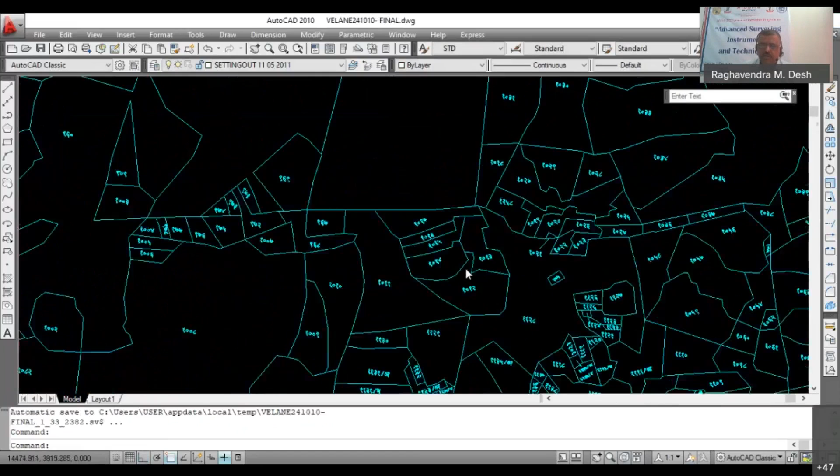So if you want to purchase land, you need to know you have been given two documents: a government demarcation maybe, or a 7 by 12 extract. So how to determine whether we are getting the same land physically?

There are two different terminologies nowadays: land as per record and land as per possession. People who are not very aware of the lands they are holding may not keep the boundaries very safe, and there is always somebody who creeps in and the encroachment happens.

So when you want to purchase that piece of land, the total station has to be sent there to collect that boundary, whatever has been shown to you, and to understand whether the land is physically measuring or admeasuring according to the record or not. You also need to see whether the boundaries as per the record and boundaries on ground are matching with each other or not.

The location of the land in urban areas cannot really differ, as they may differ in the outskirts of urban areas or in villages where there is not much movement and not much transaction happening. Or even if the transaction is happening, the people are unaware of their own land, where the land is situated, and they have been cultivating a different piece of land altogether. These things are very likely to happen. So for a surveyor, it is their job to understand how these things are placed, and whether we are giving the correct location for these people or not.

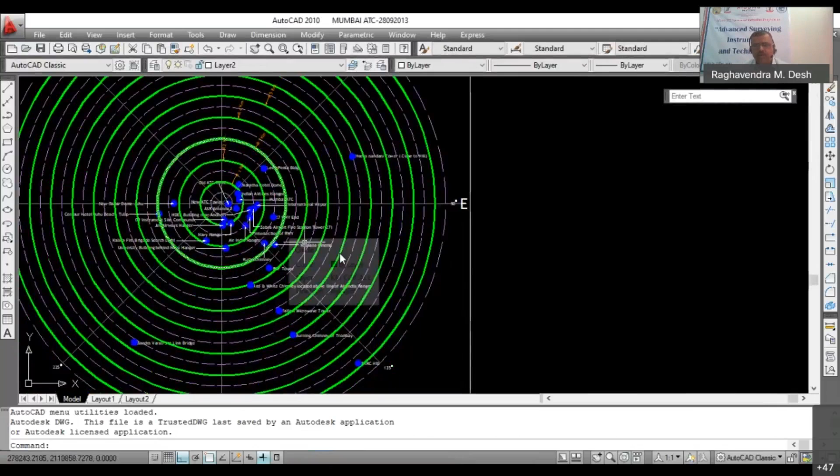Now, one more interesting drawing I want to show. There is air traffic control, and this air traffic control needs to prepare a drawing for, say, some radius. I can tell you what the radius is here. You can see the extreme points - the radius is 10,500, that's 10.5 kilometers.

Now, what does this drawing give you? This gives you the high-rise buildings or structures which may be conflicting with the aeroplane approaching and leaving. So these are all the points collected from what you can say the handy GPS - those GPS are accurate to 3 to 10 meter accuracy. So for a building, that much accuracy is good enough. We don't have to have that for planes which have been landing and taking off from the airport - 4 or 5 meters hardly matters.

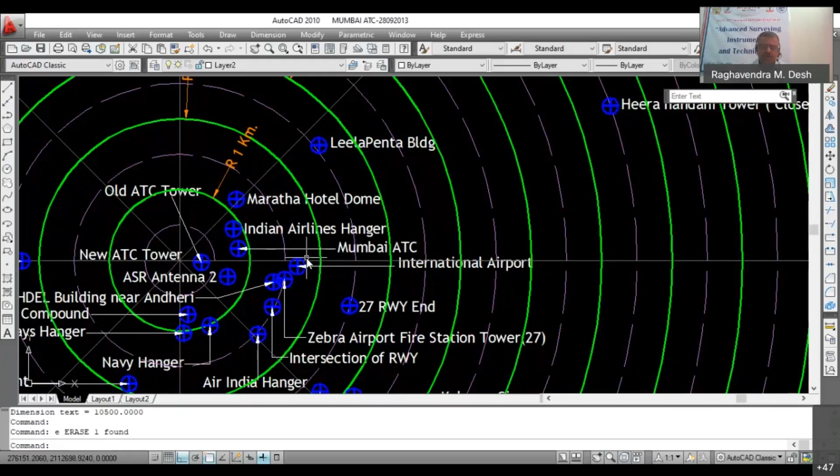So they need to understand what are the positions of the tall structures or tall monuments or the tall hoardings surrounding the airport, and how they are placed with respect to the runway of the airport.

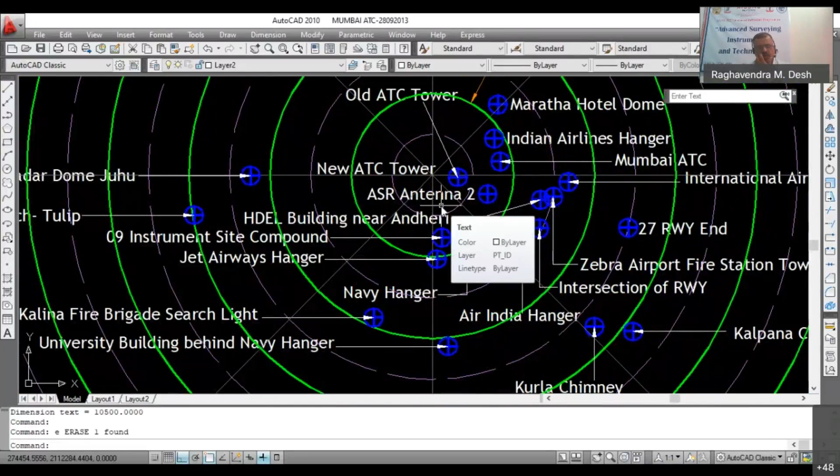Now, here with this as a 10.5 kilometer radius, the runway is hardly very small, and again because we have shown the north and everything, you can just put a line of runway here and understand how the things are placed. These are the circles which we have drawn - every circle is about, say, 500 meters, a 500-meter circle around the center of the runway. And likewise, these circles are drawn.

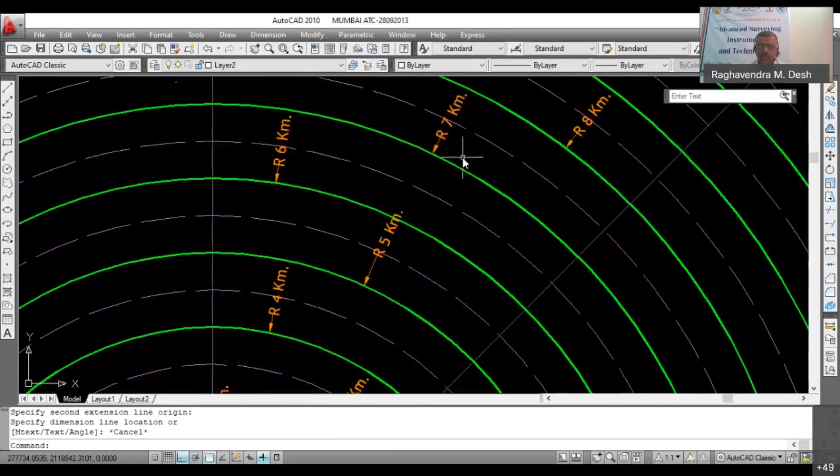So you understand, okay, now this Centaur Hotel Juhu Beach is approximately 500 meters, 1 kilometer, 1.5, 2, 2.5, say a radius of 3 kilometers from the airport. So when you want to determine the approaches and the landing directions for the airport, for the aeroplanes, you should know whether, now you can see in these directions - that is north, between north and west - the whole area is open. So whether you can really take off from that side, or whether you can really land from that side, or even if in this area there are hardly any structures within the vicinity of the airport.

Now what you call vicinity is something that differs everywhere. So an airport may have a different definition of vicinity, maybe beyond 2 kilometers, 3 kilometers, or less. So you can see here right up to 9.5 kilometers, you can see everything is in a single line. So you cannot really have an approach defined from these areas. So even if the aircraft comes from any other location, they have to change their way and approach, as they call it. When they say that this aircraft is approaching, then it is approaching from a certain side. So these can be determined from these air traffic control drawings.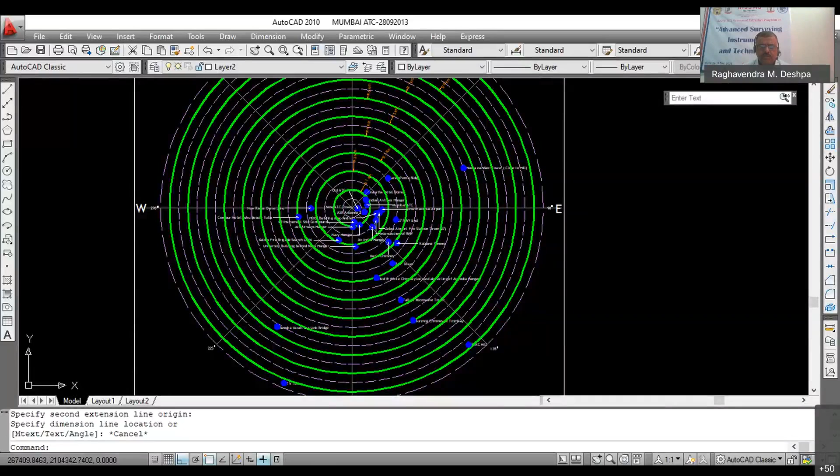Now you can see they have been prepared for a number of airports at different locations. Here also they just wanted to have a very small radius, about say a kilometer or 1 kilometer. So again here they are mentioned, and they mention the angle with respect to the north. So if you see one number, where is that one number?

So it will be somewhere along this angle, 113 degrees, and likewise others are mentioned. So these are angles, and you can say they are bearings with respect to north. That's what they have shown here, so people understand it. Now this is something we have mentioned here as well.

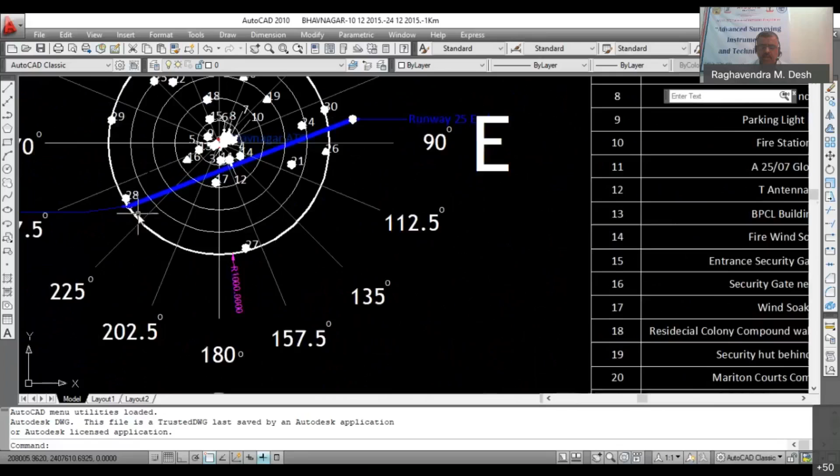You can see that whatever is there at a 1 kilometer radius, these 28 number, so localizer runway 07, day and night visibility marks are there. So what they have shown is only for the sake of visibility. So if you have more than the runway and something surrounding the runway, you should know whether it is day marking or night marking.

So again, this is a good use of survey. This is all you can collect even with the total station, and you can also collect it with the GPS, depending upon what accuracy you are looking at. So this is how things are there, how the drawings are prepared, and how the drawings are put to use.

So I would like to do a case study basis, I want to tell you, it may not be exactly for the total station, but it will be a part of total station, where the total station is involved, and a process of how we started for a particular project, from defining the land to survey, and further acquiring the land and doing it for the final drawings and finishing.

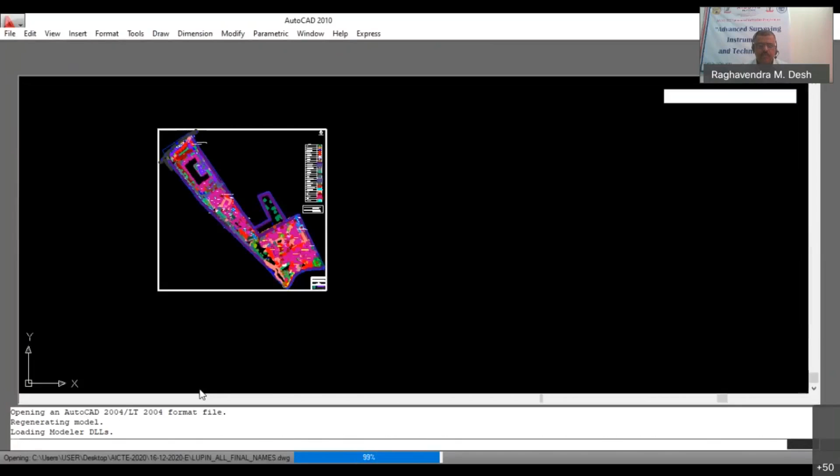I'll just share one more drawing with you. This is again a company, Lupin, a company drawing in Pune. They have a research and development facility. Now again you can see this is the green building, what they call it. And the requirement for this particular survey was, again, they wanted to know the green area.

Now, as per the new norms of that LEED certification, I think, if you want to have a green building, if you want to call your structure a green building, then that building has to be constructed in a certain way, without taking any material of excavation and other things out of your compound, and it has to be merged within your plot. And then it has some facade requirement, light requirement, ventilation requirement.

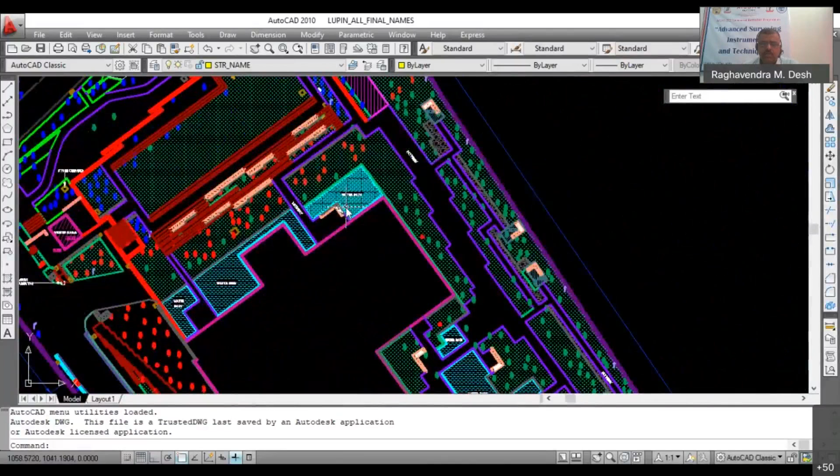Along with that, one more requirement is the green area surrounding that building and overall available in the particular premises of the company. So you can see here, this green area means where they have put up lawns, where they have put up small shrubs or flowery plants, and where they have put up some lawn and shrubbery only, and nothing else, because these are the trees that are already there, as well as the water bodies.

Water bodies and green area is something which they want to have on a drawing. Now that area percentage, they have some norms for that area percentage, to know whether they can call this the green building. So all these structures you can see here are the old structures, old facility structures. Only this building, as a corporate office, has been built recently, and they are calling it a green building.

So again, they have purchased a piece of land here, and then to have any kind of development happen on this piece of land, they need to understand the exact availability, exact layout of the entire plant, how it is placed at the latest date, and how much FSI has been consumed, or how much ground coverage has been consumed with respect to the total area of the plot, and whether whatever new development they want to make is permitted as per the FSI rules and regulations. So this was the requirement, along with the hardscape and softscape area as well.

Now at many places, whenever billing is to be done, say for particular areas, we have done one total station survey in one of the societies, where the contractor had done asphalting of the entire road, internal roads. Again, the road was not in straight lines, curves and curvilinear shapes were there, which are really difficult to measure, or even if they measure it, they may not be accurate.

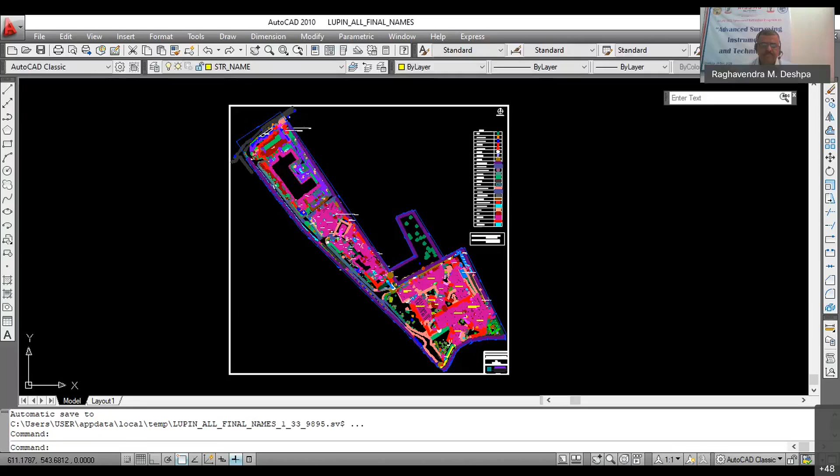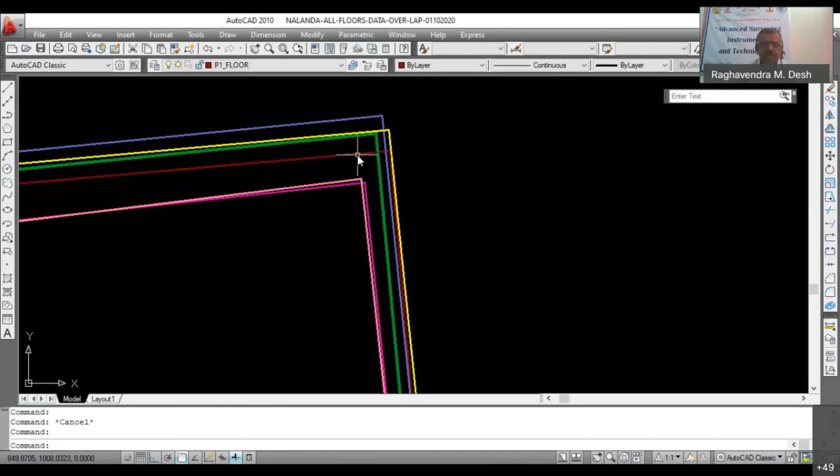If you check the layer, I have selected this bluish color - this is the P3 floor column. The yellow is the P2 floor column. This is P1 floor column. This is F1 column. Now this is the data which has been collected. We have put up basement, ground, P1, P2, P3, F1, F2 floor on one another with the same base, so you can see the variation in columns.

Now this is very... for anybody you can say, wow, this is a very horrible situation. But even if it is there, you have to work out a solution to that. And to work out a solution, you need to have this data very accurately taken.

Now here we have the basement floor plan, that is the architectural layout, and the as-built basement floor plan overlap. You can check it column by column how it is differing. This is as per the layout, and this is as per the ground. So here you can see the difference. These differences can be measured in x and y direction.

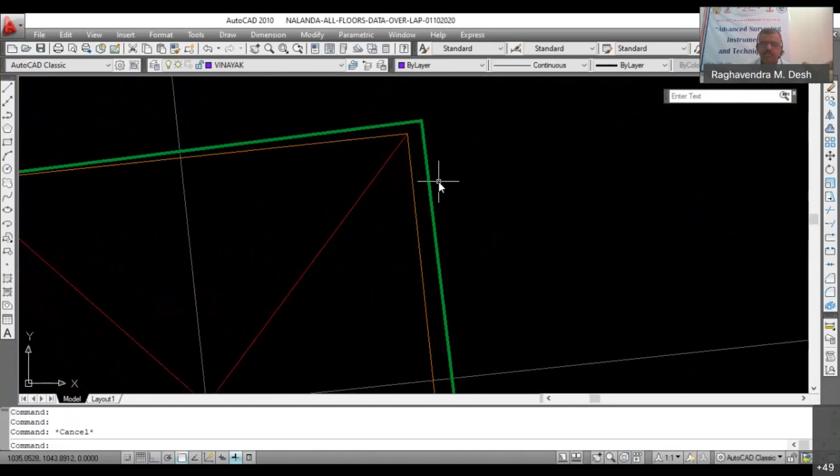So this is how the things are. Now, if you want to avoid that, then you have to have a surveyor agency with a total station all the time on site, and for every column, the marking has to be given by total station.

If this importance and utility of total station is explained to the students, then when they go on site, they can put it to the management - no, we have to do it by the total station to avoid these kinds of mistakes.

It is generally estimated that about 5 to 10% of the cost of the project can be saved if you use total station properly. That's a huge cost saving. But if you see the cost of engaging total station, it is hardly peanuts compared to the cost of the total project. So it is just the lack of interest or lack of initiative by the management which prevents them from engaging total station at every stage of the work.

There is one drawback definitely - the dependability on the total station increases as much as anything. But you tend to learn how to optimize the use of total station at different stages of the construction or any project. You can determine and optimize that, and you can even reduce that cost also, at the same time saving the cost of the project.

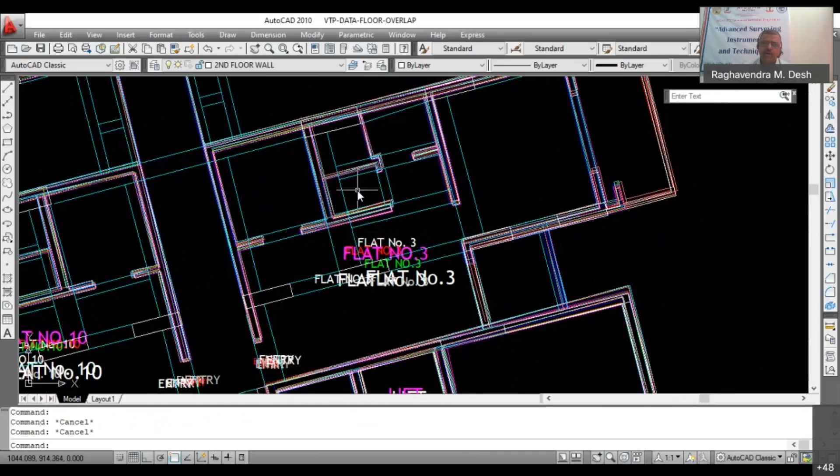These are the 9 floors right from the ground floor. This is the ground floor, what I have clicked, and the ground floor has a network of beams and columns. But from first floor onwards, where the typical floor starts, the Mivan formwork has started. So even using Mivan formwork has given them such an error.

Now they are all attributing this error to the corona outbreak and some lack of supervision and all that. But again, just the point we discussed before - here they have different agencies, the PMC, project management consultants, the architects, the site engineer, have a good number of engineers, staff is adequate, but still these things happen.

These things happen because whenever a total station is used, it is not checked after giving those points or setting out points. So you will understand to what extent the work can go wrong, as I'm specifically showing you in this drawing. This is not just to blame anybody or to show how the wrong works are being done in the field. It is just to understand how it can be avoided, avoided before it goes out of hand.

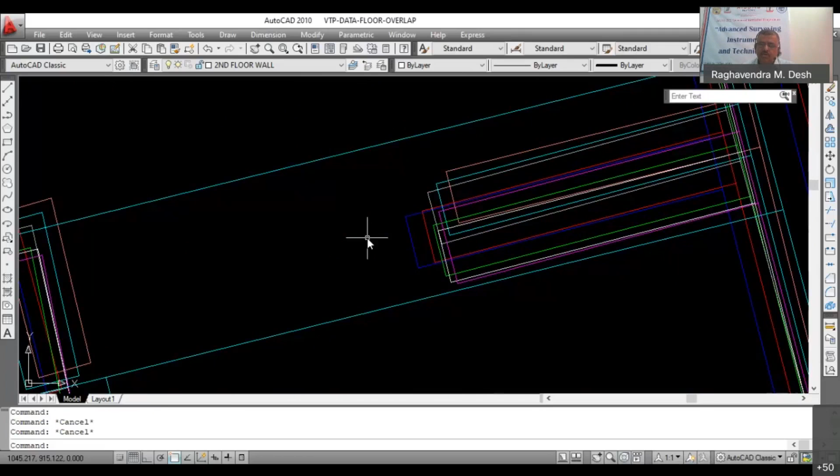Now whatever the solution they are going to work out, it's up to them, but we have to show this data. And now this is again, we have just superimposed everything.

Now here you can see the data what we have collected. When you are doing it with mivan formwork, the aluminum formwork, the entire floor is cast in a single pour. So you can see this is the first floor. There is hardly any deviation. We have collected each and every point, and then only we have drafted this. So as we go from first floor to say fifth floor...

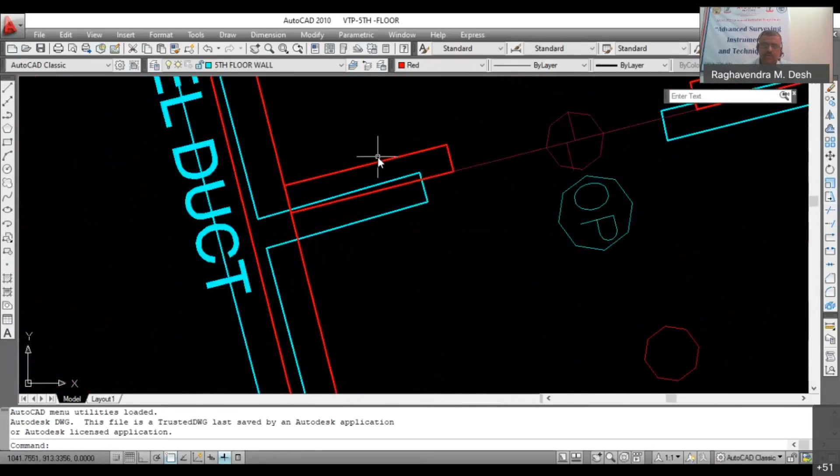Here we have superimposed this. You can see how it is different. Now these are the floor plans and these are the actual positions. You can see how they have differed. Why they have differed here - again it's a relative lapping what they have done. If you take this lapping to this point, you can see that the variation is very less, but the variation will appear somewhere else. You can see the difference here.

So this is how the work has gone wrong on every floor. If you're not using total station and just using the plumb line to take it on the upper levels, you hardly understand the cumulative error it is generating. From first floor, if you see all the drawings together like a flicker - these are stationary drawings, but when you flick it, you can see the action being generated. If you flick these drawings put together, you will see how it has deviated from first floor to eighth floor. For the ninth floor, they have again brought it back to the position of first floor because of the total station marking.

So avoiding use of total station can lead at times to disasters on site. Even if it is used and not properly used, you can get the same results. So you have to work in tandem - with the PMC, with the contractor, with the site engineers and the surveyors. And again, you should understand the requirements of that survey. Once the requirements are understood, you can properly brief the surveyor or the respective people on why you are doing this particular job.